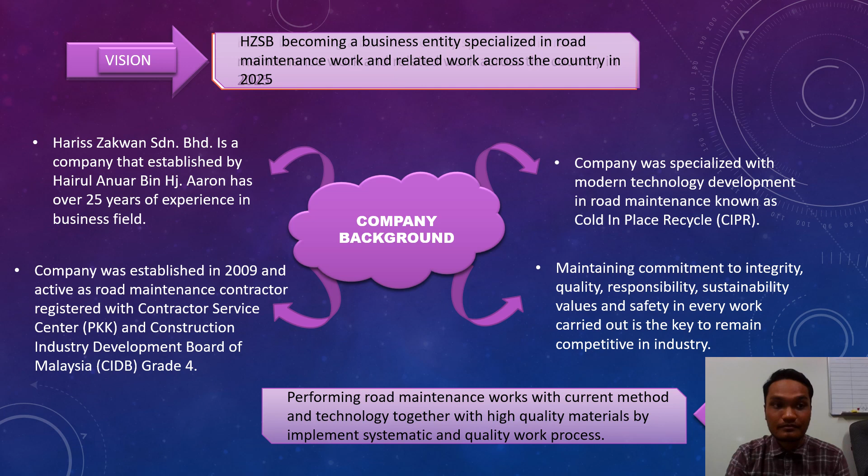The next one is working environment. The working environment in Hariss Zakwan is very systematic and effective since road maintenance work is temporary. For example, the working period in location A is 2 days only, and on the next day, work should be done in location B. The distance between these two locations is very far, for example, Kuala Selangor and Sabak Bernam.

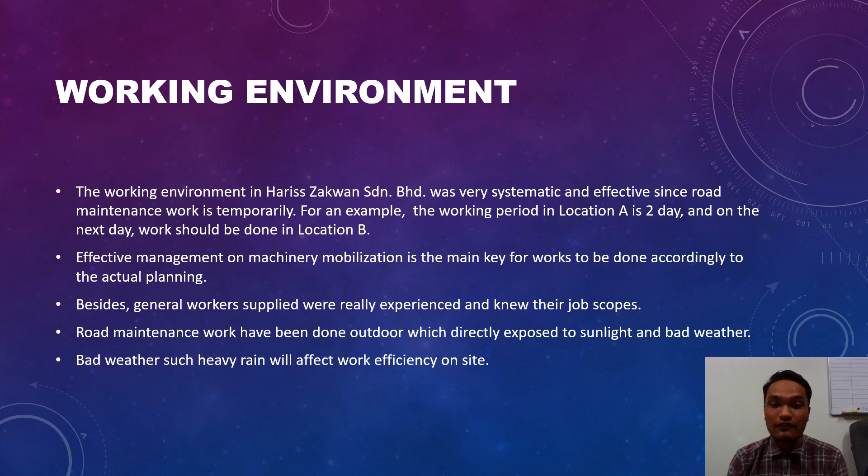Effective management of machinery mobilization is the main key for works to be done according to the actual planning. Besides, the general workers supplied were really experienced and knew their job scopes. Road maintenance work is done outdoors, directly exposed to sunlight and bad weather. Bad weather such as heavy rain will affect the work efficiency on site, so it will be delayed.

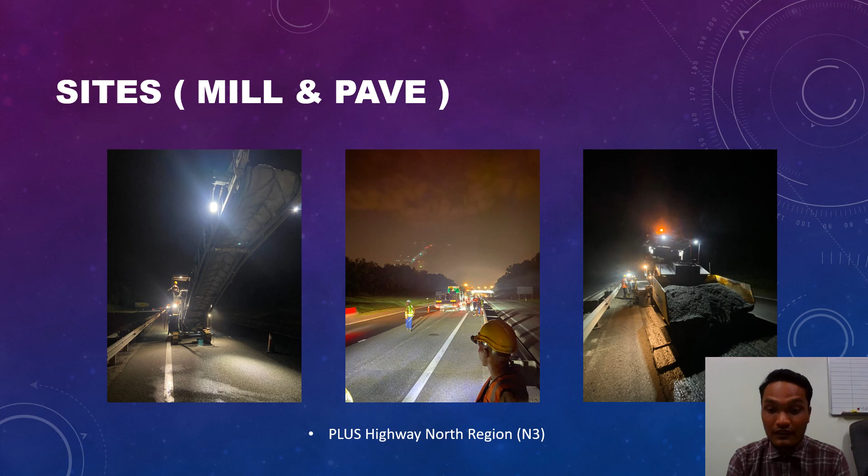This is the site. The first site we were allocated is in Kedah, Plus Highway North region, in region N3. For this one, the working hour is restricted from 2 a.m. until 6 a.m. only, because it was the standard operating procedure, SOP, provided by Plus to avoid any traffic congestion during the day. If any work is performed after 6 a.m., the company will be fined 10,000 ringgit Malaysia for every extended hour.

The next site is CIPR work. Most of our sites are performing CIPR. The first one is SKVE, South Klang Valley Expressway. The next one is Jalan Binjai Jaya, Sabak Bernam, and the next one is Jalan Masjid, Sungai Yu, Kuala Selangor. At the first site, SKVE, the total area of road to be repaired is 4,100 square meters. The second one is Jalan Binjai Jaya in Sabak Bernam, where the total area is 6,050 square meters. The third one is Jalan Masjid in Kampung Sungai Yu, where the total area is 4,200 square meters.

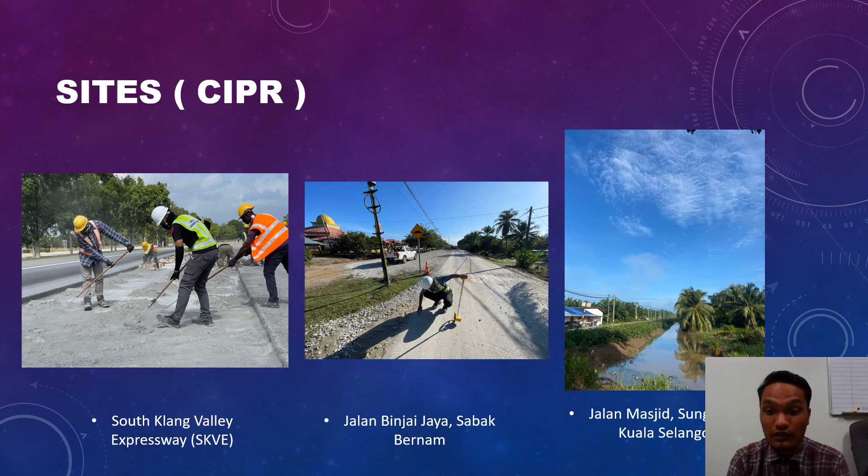This is the latest one. The site was in Jalan Rawang, Bestari Jaya, where work was done last Saturday, with a total area of 4,100 square meters. For additional information, the CIPR method was mostly used as an alternative to road reconstruction to shorten the maintenance work period and cost, so those are its advantages.

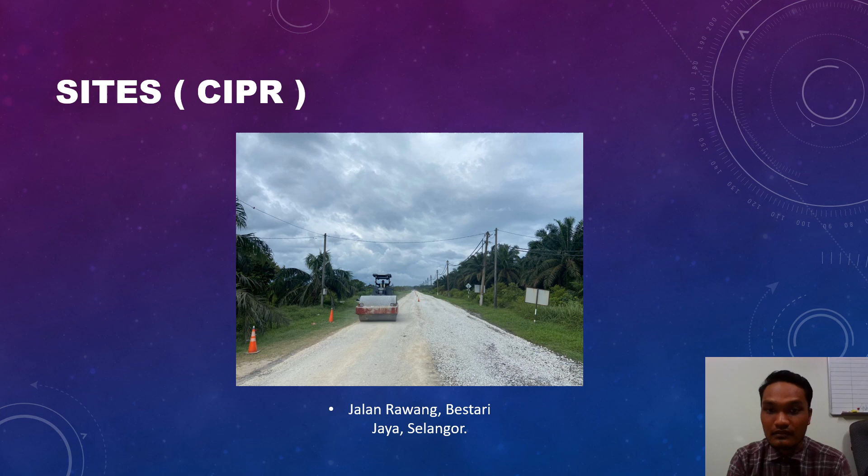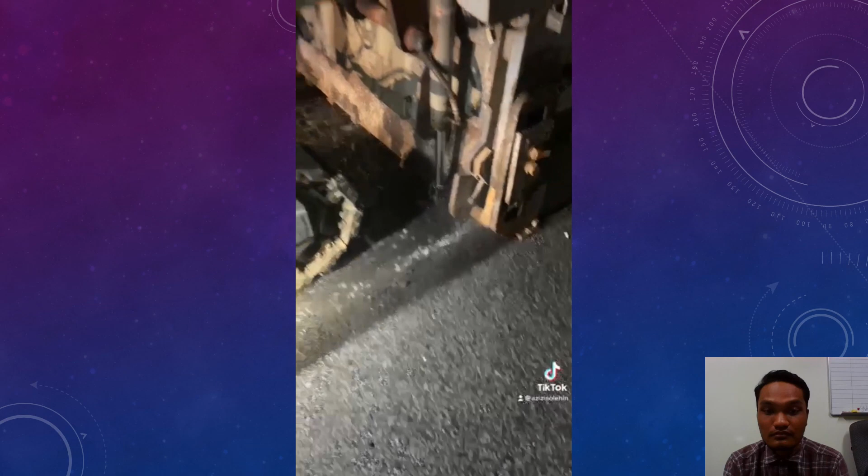This is the video of the milling and paving process. This one is milling. Then we use a bobcat machine for debris cleaning, and the next one is tack coat spraying. After that, we pave using a paver, and then compacting. The process is so simple and work is done.

This is the scope of work. Mill and pave first. Milling is the process of removing at least part of the surface of a paved area such as a road, bridge, or parking lot. The technical practice during this activity is checking the dipping. The fast lane requires 50 mm for asphalt concrete wearing course only, and the slow lane requires 50 mm and 60 mm of binder course, because heavy vehicles use the slow lane, so we need a thicker milling.

The next one is paving. Paving is an activity of laying asphalt concrete according to the desired thickness on a milled road or existing road. It can also be called patching or resurfacing. The technical practice during this activity is checking dipping, same as milling. The next one is the premix pattern for company reference for premix orders. Pattern calculation is length times width over weight of premix in tons.

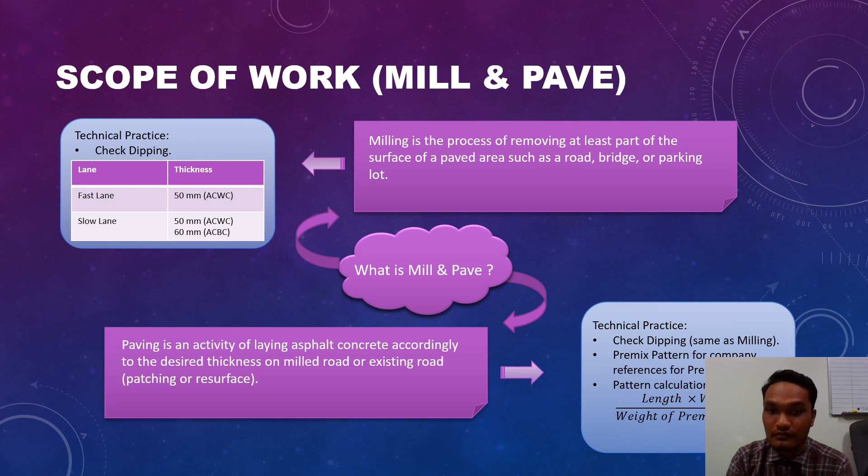This is the scope of work for CIPR, cold in place recycling. CIPR uses a recycling machine to pulverize the existing pavement layers to a maximum depth of 250 mm, then adds either cement or bituminous material or both as a stabilizing additive before laying it back to the same pavement in a single process. The process is: first, grade line calculation and marking, and then cement spreading. Next is mixing using the stabilizer, which is the CIPR machine. Next is early stage compaction, then grading, and the last one is final stage compaction.

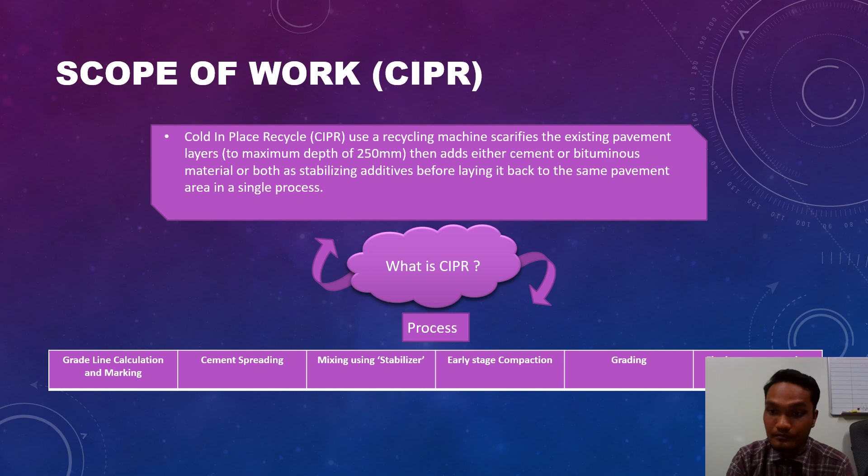This is the CIPR process. We can see it graphically. The first one is grade line marking, then cement spreading by general workers, and then mixing using the CIPR machine or stabilizer. Then early stage compaction. After that, grading to get the desired thickness on the road surface. And then the final compaction, which means the work is done and we can smile.

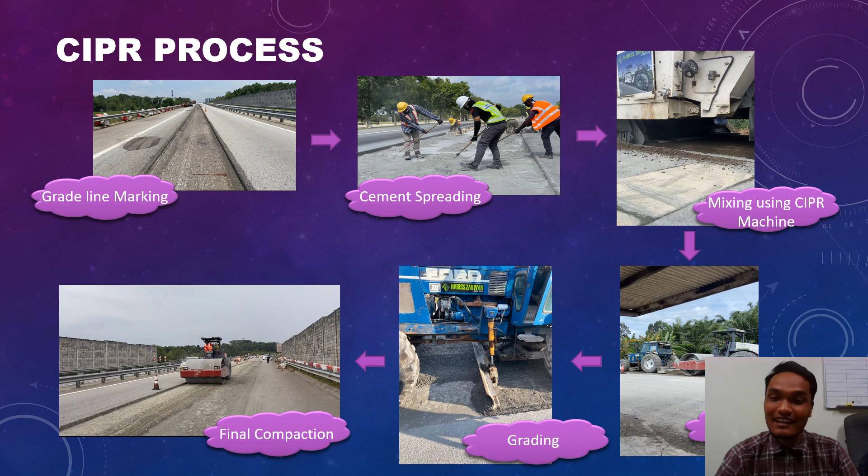This is the technical practice for CIPR. This is an example of identifying the amount of cement to be used per square meter. Density and cement percentage are provided by Ikram Laboratory from a trial pit. From the result, Hariss Zakwan used the 5% design to be implemented in SKVE, the first CIPR site, which results in 22 kg of cement per square meter.

To calculate the grade line length, we must obtain the area first. To obtain the area, the total weight of cement in the design should be divided by the weight of cement required per square meter. For example, we want to use 6 bags in a grade line. Thus, 6 bags of cement equal 300 kilograms of cement, since 1 bag is equal to 50 kilograms. We divide the weight by the weight of cement per square meter required, which is provided by the client. Then we can obtain the length with basic mathematics by dividing the area by the width of the road. So we get the length per grade line.

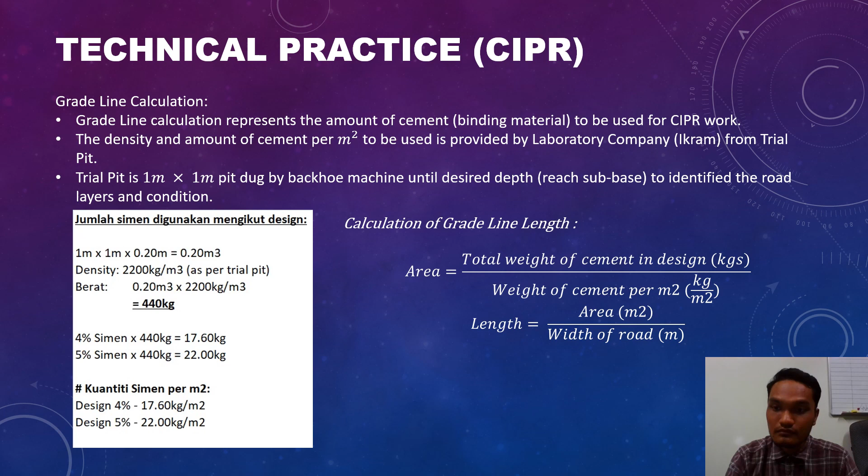This is the short video for the CIPR process.

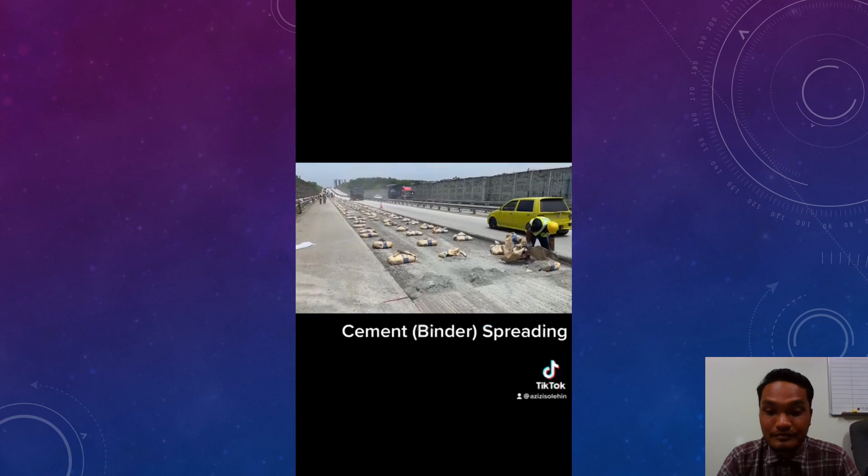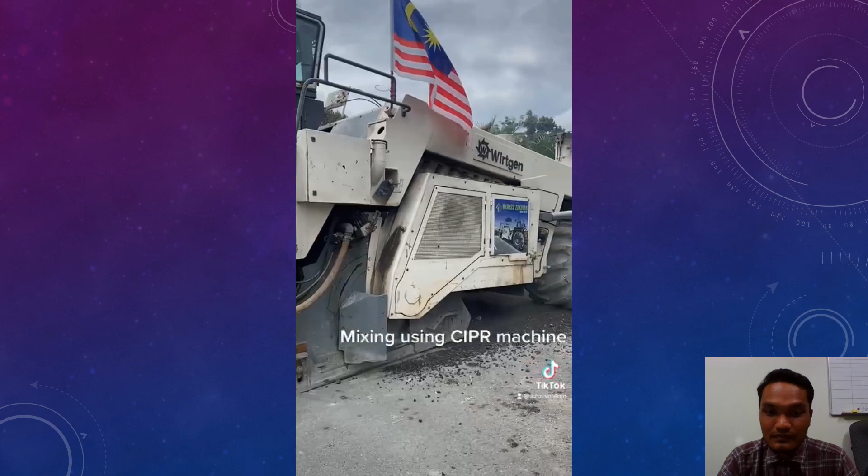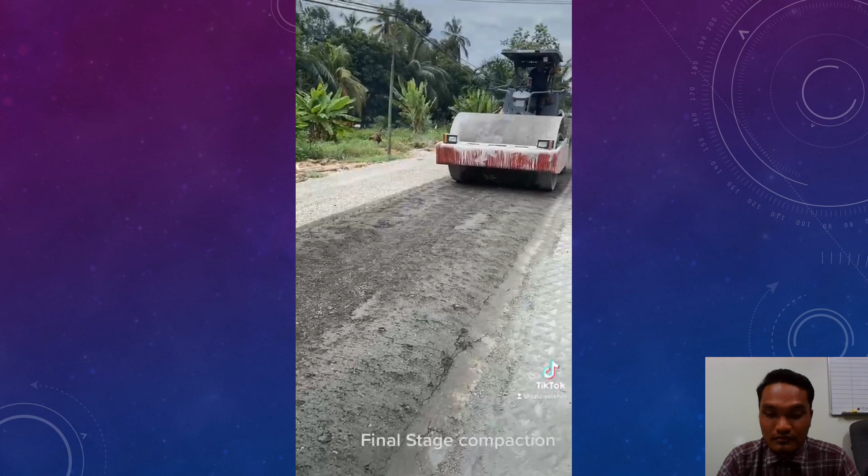Yeah, that's all. Work is done.